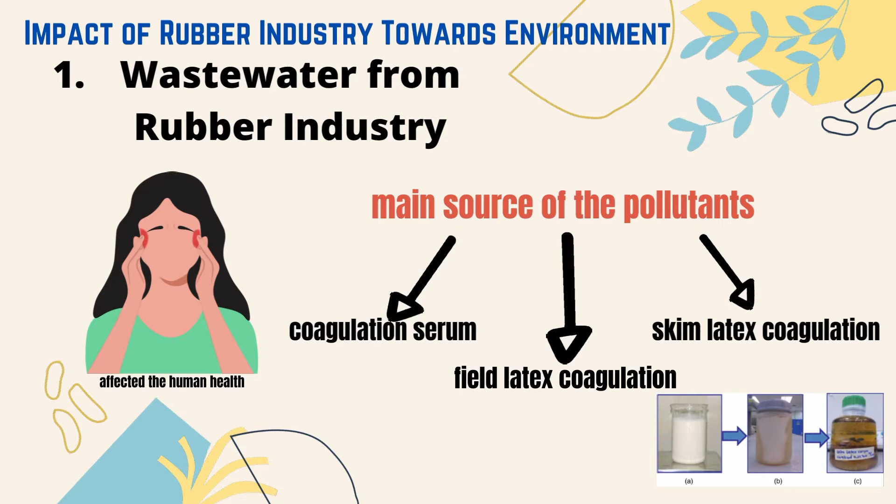There are several impacts of rubber industry towards environment. Firstly, wastewater from rubber industry. Since rubber industry uses chemicals and other utilities and produces enormous amounts of effluent, discharge of untreated rubber effluent to waterways resulted in water pollution that affected the human health. The main source of the pollutants is the coagulation serum, field latex coagulation, and skim latex coagulation. These compounds will result in high oxygen consumption upon discharge of wastewater.

Secondly, rubber industry also contributes to other environmental problems besides wastewater discharge such as air pollution. In rubber sheet drying industry, smoke particles contribute to pollution in workplace and neighboring atmosphere. The high concentration of aerosol particles in the atmosphere can cause adverse effects on the workers' health.

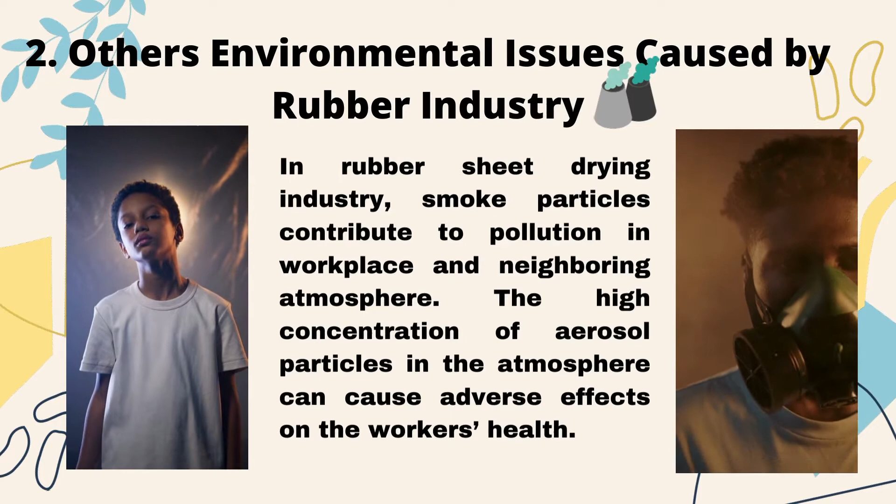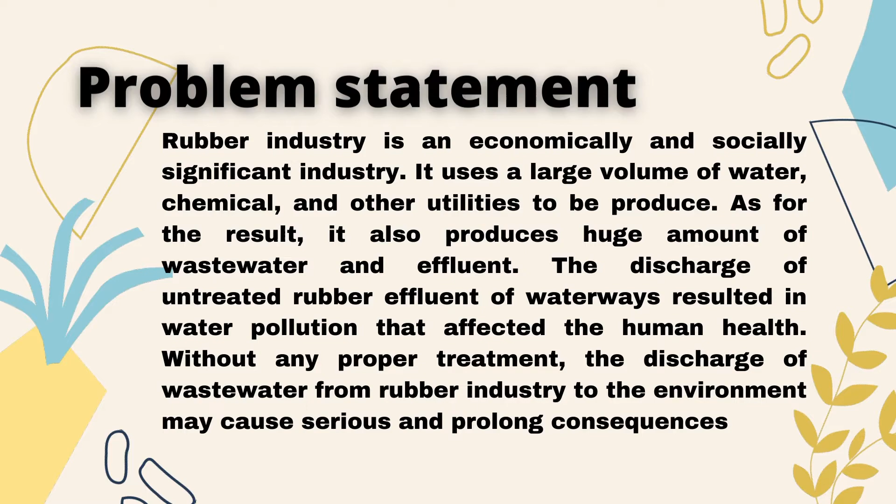Problem statement: rubber industry is an economically and socially significant industry. It uses a large volume of water, chemicals, and other utilities. As a result, it also produces huge amounts of wastewater and effluent. The discharge of untreated rubber effluent to waterways resulted in water pollution that affected the human health. Without any proper treatment, the discharge of wastewater from rubber industry to the environment may cause serious and prolonged consequences.

Moving on to the literature review. The rubber industry is a major resource-based sector worldwide. Without proper treatment, the discharge of wastewater from rubber processing industry to the environment may cause serious and prolonged consequences. Rubber wastewater is typically treated using pond technology, as well as aerobic and anaerobic processes. Biological treatment of rubber wastewater reduces BOD the most. Wetland waste treatment systems and in situ hypochlorous acid generation could be used in wastewater treatment.

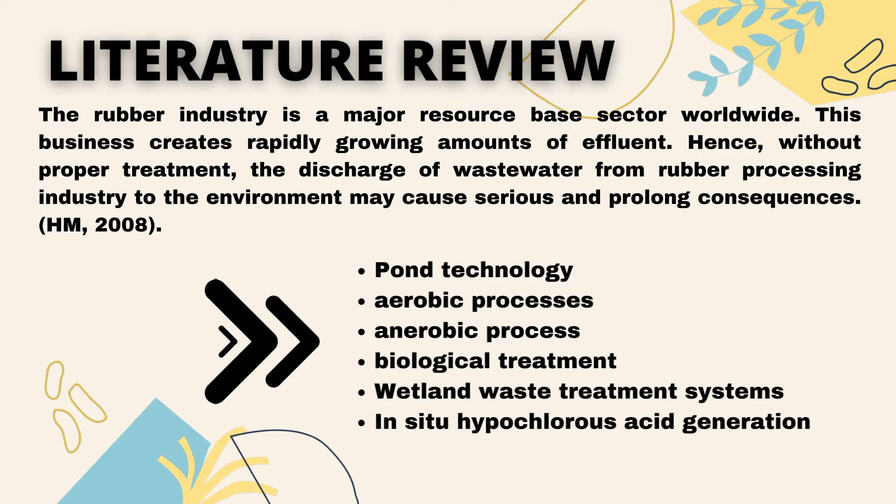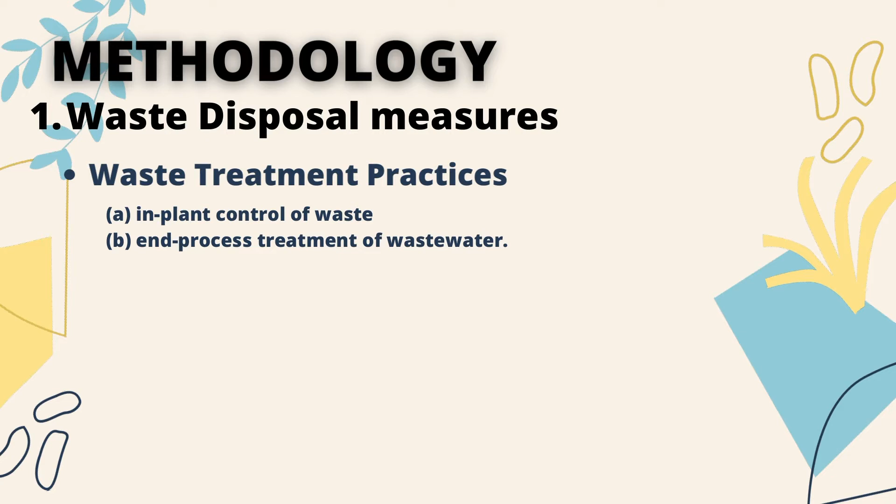In terms of methodology, we would like to discuss firstly waste disposal measures. Waste treatment practices may alter in like manner to the characteristics of effluent releases and admissible limits. Some in-plant control measures will be introduced to enable reduction in consumption of water, generation of pollutants and to extend the efficiency of the end-of-process wastewater treatment.

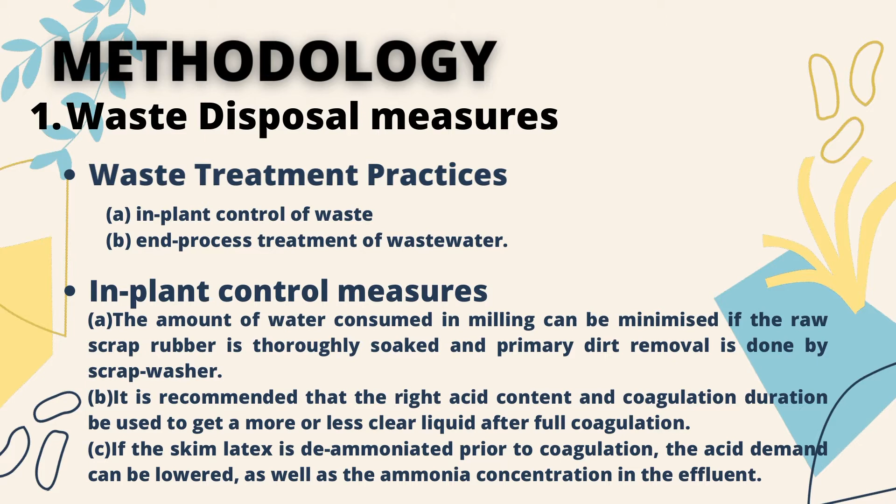Secondly, in the crepe and crumb rubber units that handle field coagulum, the amount of water consumed in milling can be minimized if the raw scrap rubber is thoroughly soaked and primary dirt removal is done by scrap washer. It is recommended that the right acid content and coagulation duration be used to get a more or less clear liquid after full coagulation. If the skim latex is deammoniated prior to coagulation, the acid demand can be lowered, as well as the ammonia concentration in the effluent.

In methodology also, we would discuss end-of-process treatment. Basically, wastewater treatment can be divided into pre-treatment, primary treatment, secondary treatment, and tertiary treatment. In pre-treatment, the rubber trap used to catch suspended materials should have a 12-hour retention capacity and proper baffles to create a continuous up and down flow pattern. This can minimize suspended solids by 40 to 60% if appropriately built.

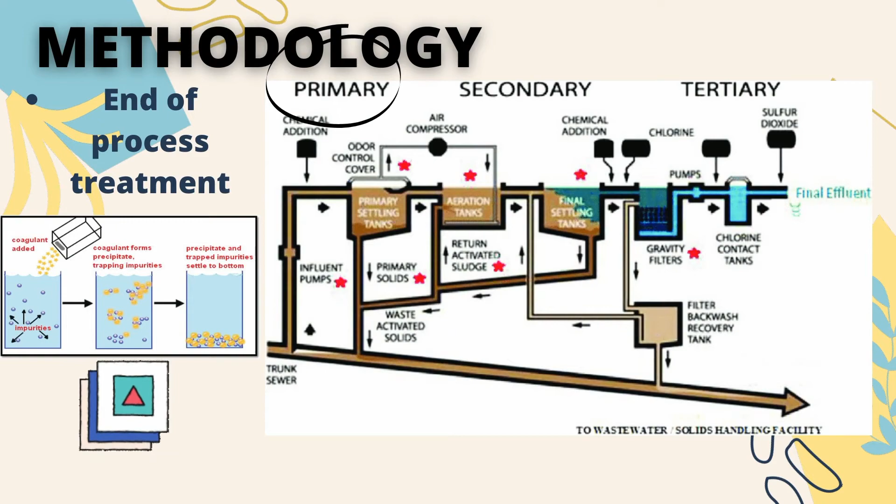In primary treatment, for a latex processing unit, effluent from the equalization tank is sent for neutralization and chemical treatment by alum and iron salt. Secondary treatment is a biological process which makes use of microbes or bacteria and algae to absorb the organic matter present in wastewater. The methods outlined above will result in significant reductions in pollutants, particularly BOD and suspended solids. In tertiary treatment, chlorine and chloramines are used for disinfection processes. UV radiation is used to disinfect the water.

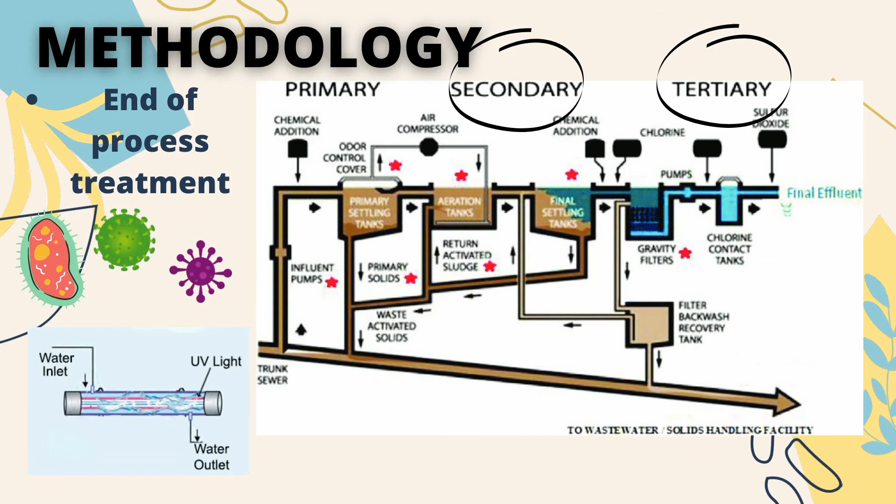Besides, there are some advanced rubber wastewater treatment methods that have been introduced and proved to be useful in the rubber industry, such as biological methods, chemical methods, ozonation, and combinations of physical, biological and chemical methods. The biological method can remove over 95% of BOD, while pond technology has the capability of removing over 95% biological oxygen demand, BOD, from rubber wastewater.

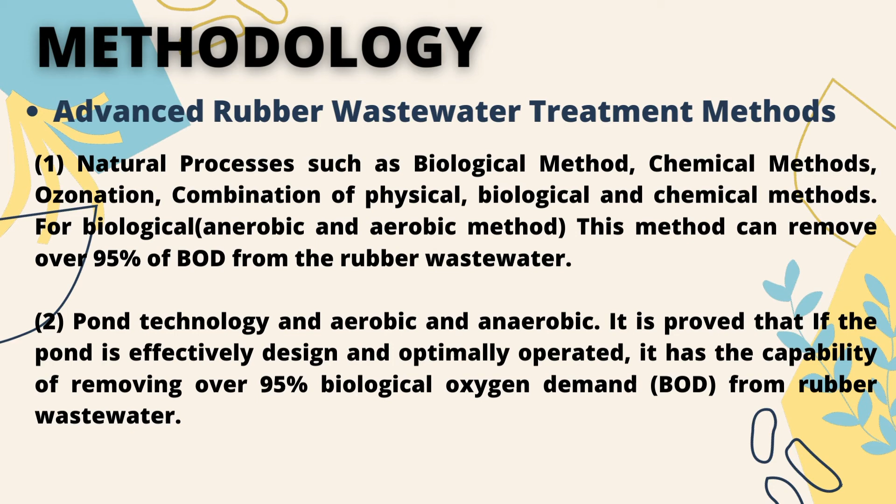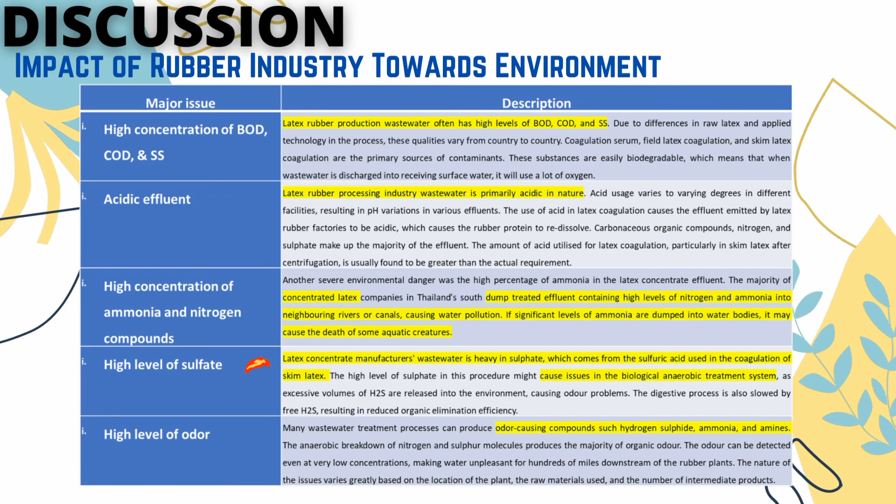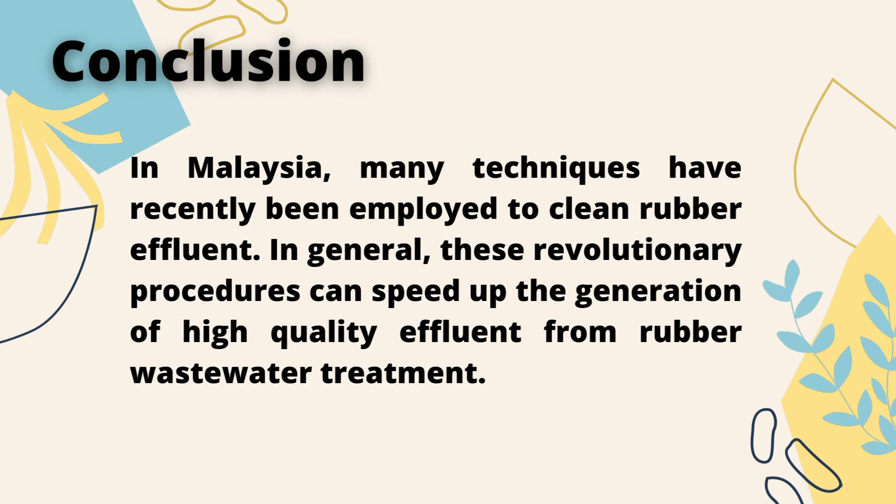There are major issues caused by the rubber industries to our environment. The major issues include high concentration of BOD, COD, and SS, acidic effluent, high concentration of ammonia and nitrogen compounds, high level of sulfate and high level of odor. In Malaysia, many techniques have recently been employed to clean rubber effluent. In general, these revolutionary procedures can speed up the generation of high-quality effluent from rubber wastewater treatment.